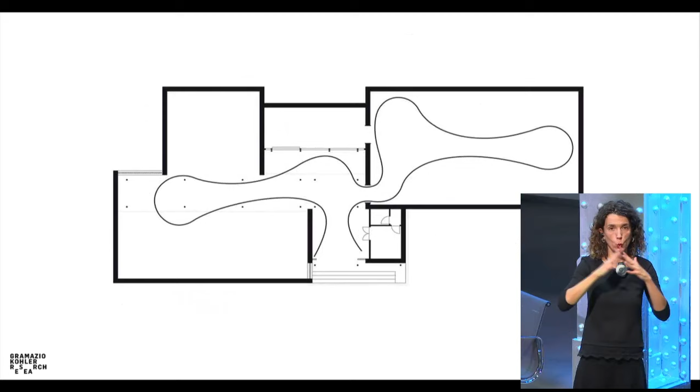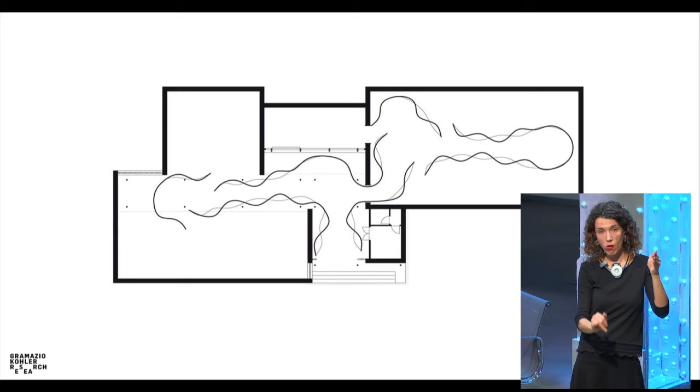Now, this was the installation in the pavilion. It's a 100-meter long wall, and the installation is called structural oscillations because wherever this wall was relatively flat, the wall started to oscillate, and wherever the wall was curved, it just stayed straight up. Now, why did it do that?

Well, this was a way to have all these individual wall elements standing by themselves. So you didn't need any further structural support. You didn't need any anchoring in the floor. Basically, it's like a sheet of paper that you fold a bit until it stands. So we embedded the structural logic into this wall, and through that made a very simple constructive system to build this wall.

And now you can see these qualities that this wall has. It has a very textile appearance. It's very lean in material use. You see how thin this is and how elegantly this winds through the space. But you can also see that we did not design the actual shape of these oscillations. We designed the logic, the rules, the algorithm, you could say, on how this forms.

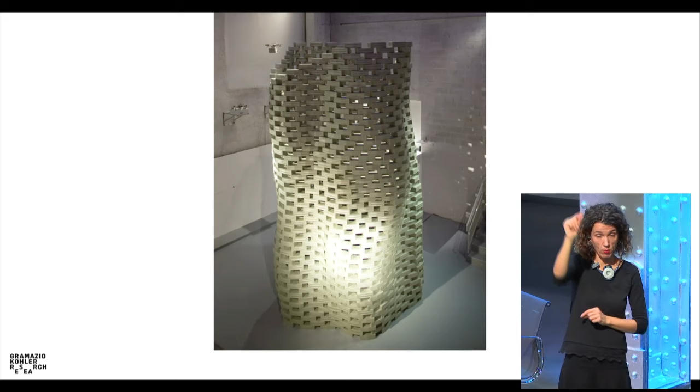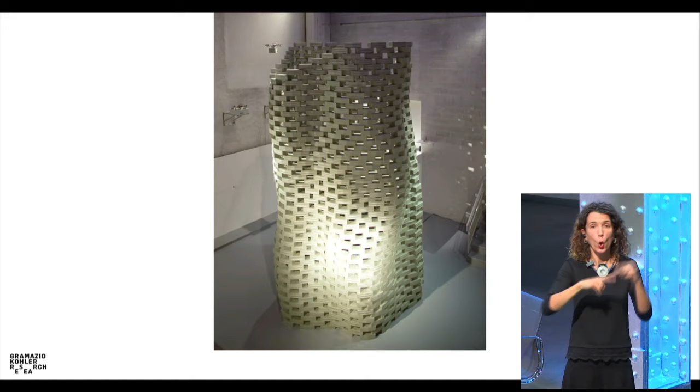Good. So a bit earlier than this project, we did an installation also with flying quadcopters with the same professor. With this installation, there was a 6-meter high tower for the FRAC in Orléans, and this tower was autonomously built by 4 quadcopters which changed shifts. So some of them sometimes went to charging while the others continued working, and so on. So no human ever touched this vertical structure.

And we took this as a starting point also for a fictional project. So we said, can we think of this structure as a model for a city? And we co-developed a project for a city and a project for robotic assembly. What you see here is actually the city, so it's a 600-meter high tower. It's a city for 30,000 inhabitants, and it's a city as an object. The idea is that it's fully self-sustainable in ecological terms, so you have energy generation in it, etc.

And that's on the one hand side. On the other hand side, you could also take down the city if you don't need it anymore. So the idea is, well, you build it up, but you could also build it back. So you don't just grow city carpet over city carpet, but you really contain it in an object and you build it back. That's the kind of conceptual model.

It had these double-story park rings. This is 10 meters high. The length of such a ring is 1 kilometer, so you can walk around in this structure. It's fully pedestrian. There's no car in it, of course, but you can also go to the outside because the city is located in Meuse. That's a region in France where you have the lowest population density.

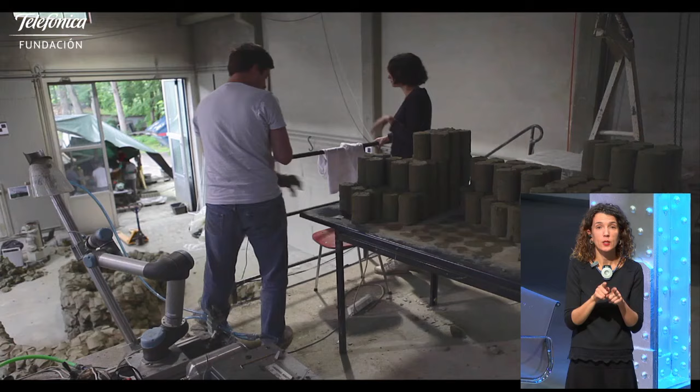We extruded clay projectiles, made sure that they all have the same weight. And then we put this on this small cannon, which is directed by a robot. So we shoot it off from this little gallery up to a distance of 10 meters away.

Scan what we produce, so that we know where to shoot next. And here you see one of these clay lumps landing. You see another one. See a larger view, and you see that we actually get surprisingly precise kind of 3D print, if I may say so, with clay from distance.

So we use a ballistic principle, not for warfare, but really for civilian use. And these structures, at some points, were very, very slender, so maybe 10, 12 centimeters slender. Then the highest point, I think, was 2 meters 30, which we reached in this week. And I mean, it's very prototypical.

It's not architecture yet, but you sense maybe there is completely other ways of building which we have not yet thought about. And that's why I wanted to show you this project and how robots could also have a bit more a peripheral role. Here you are sitting at the landing point of a projectile, and you watch one projectile coming.

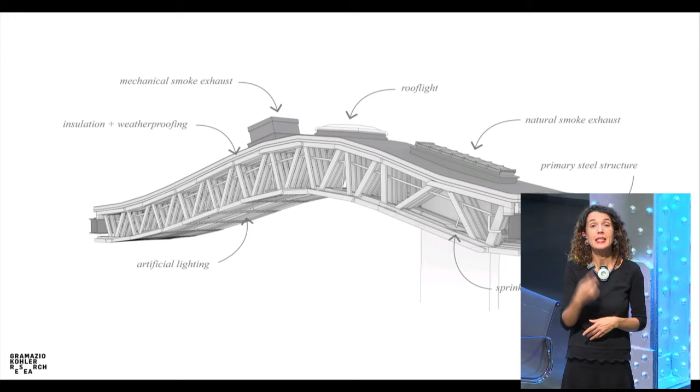So it has an optimized structural depth, this roof. It's built in these individual beam elements, 168 of them. Here you see the layout of these individual slats. But what's most important is that it embeds all the different subsystems that the building needs into this roof structure. So you see here these different systems, and now if you combine this with the plan that you've seen, you get a sense of how it adapts to every part.

And whenever you change something, so if, for example, you say, well, actually, through the tendering process, we got another manufacturer of the roof light, you change the roof light proportions, and this entire roof adapts to it. And that's another advantage of these new design processes, that you actually stay flexible until a very late stage in planning. And what usually causes huge turbulences if you change planning at a later stage, here becomes very easy.

If, as an architect, you think ahead what could change later on in the process, you can build it in, actually. This is how such a model looks. So the raw model in the front, and if you render all the parts in it, then it becomes the end model. But this model is not drawn, it's programmed. And to indicate to you why programming is needed, I show you this detail on how these slats connect.

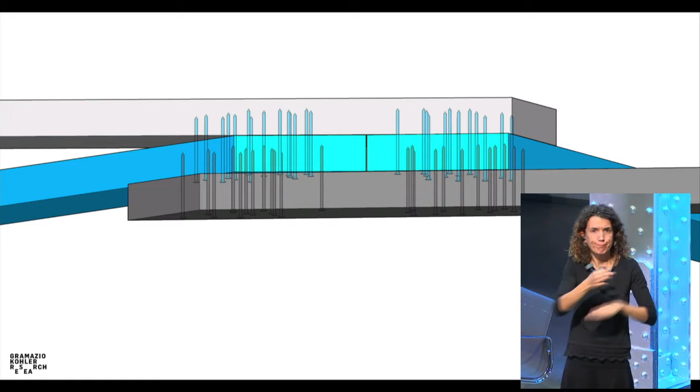There's a number of nails here, I think it's 500,000 or so in this roof, which connect these different slats. And it's so complex to bring in these nails and make sure that you fulfill the structural requirements. At the same time, you don't hit another nail in the next layer. It's really only algorithmically and with the computer that you can do this.

You don't want to do this by hand. So this is how it looks. And this is how the roof is produced. It's the Swiss manufacturer who specifically bought a machine to build this project, but is now able to do all kinds of projects with digital fabrication.

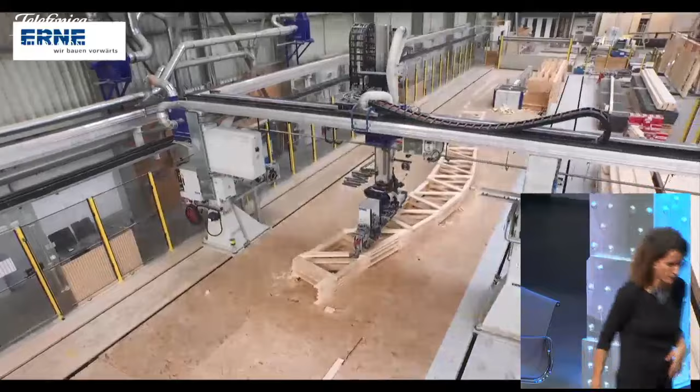So this robot basically takes a slat, cuts the different end angles, then lays them, does this nailing pattern that you've seen before, then changes its aggregate, and does some end cutting, some trimming. And what you really get is something, again, like a 3D printed beam, but here it's not printed from dust and binder or fused together metals or so.

It's literally from material as you get it from nature and connection. So it's very classical in that sense, using classical material systems and connection systems. At the same time, it's a fully digital additive construction process. And it's quite economical, and like this we could realize this building. And I can say that we all really like to live and work in this building, so we're the users also, and some other people, and most reactions are really very, very positive.

Below what you've just seen, this space, is our new robotic fabrication laboratory. This is how it looks. The floor is empty. The robots just come from the ceiling. It's basically a replacement of what used to be the crane in the hall. And now whenever you need robots or digital control, you just call them. They basically come down and assist you with building amazing structures like these, here designed by Stefana, who's sitting in the audience. Good.

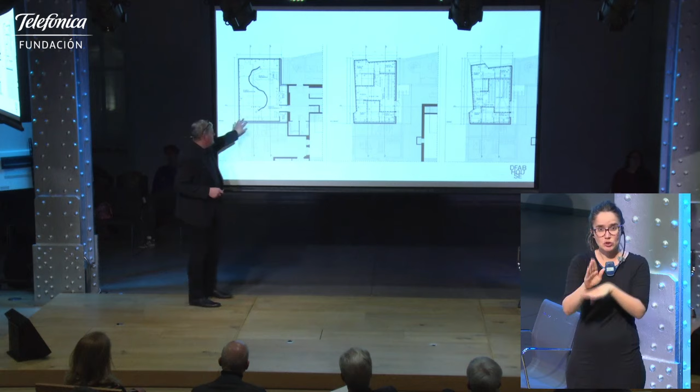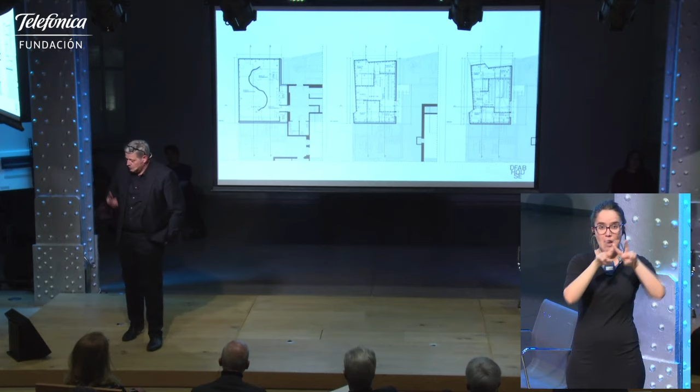And here you see the program of that house. It has basically a very open ground floor plan organized around this S-shaped wall, and then it has 4 living units for guest researchers in quite dense two upper floors. So it's a 3-story unit. This is the parcel that we got. This is roughly how it will look, but I'm not so interested in renderings. It might probably also change. We're really interested in the way that we build and design this. And these are the different research projects that go into this building.

What's really new in this building is that it's fully inhabited. It needs to comply to all codes in Switzerland, be it thermal insulation, fire regulations, etc. And all the structural parts of this building are built by new digital fabrication technologies. So we bring digital fabrication from something which has a tendency to be ornamental to something really structural. That's the significant step, even though the building itself is quite a small building. So I'm going to walk you through quickly from below to top, just to give you a first impression. This is currently ongoing, so I also will not go into details.

So the first project is really this S-shaped wall, which is built by a mobile robot. This wall has been designed in a way that it can carry the 2 stories on top and take all the forces, also the wind forces, lateral forces of the building. It's being built by a robot that builds this mesh structure that you can see here, that's optimized for fabrication. You've seen the red parts before in this animation.

Red is when fabrication cannot work anymore. So it's optimized for fabrication and for structural performance and for the spatial layout. And then this mesh structure can be filled with a manual process. So not everything is digital. It's a combination of human craftsmanship and digital craftsmanship.

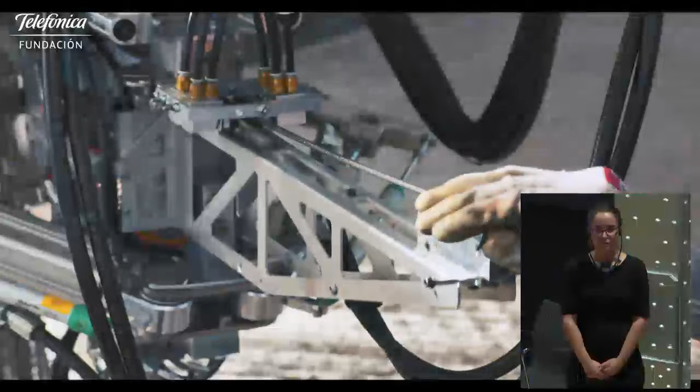If you take a look at the number of people and the robot on the construction site, you don't need to be worried in the short term. So we have about 4 people and 1 robot ratio.

Good. Now this video got stuck somehow.

Good. So here are, at least from our group, the proud finishers. This has been a work in collaboration with another roboticist called Jonas Buchli, who actually developed the entire robotic system. His people are unfortunately missing on the picture.

But I think you also see that it's even a pity to fill this structure actually with concrete. It's so beautiful, just as this doubly curved mesh in space, and you sense how the digital is very intimately connected to the physicality of this mesh. So here are some impressions, and currently it's being filled. This is the first layer, and there's going to be a top coat on it.

And the remarkable thing here is that there is no formwork needed to build this wall. So there is no waste for any formwork. You can build a doubly curved wall, and so you save a lot of material, and you can structurally optimize the shape. You can also make differential wall thicknesses, so you can save a lot of concrete, and saving concrete is a big benefit for the planet, because concrete is the most polluting construction material that we currently have. It's most widely used all around the globe.

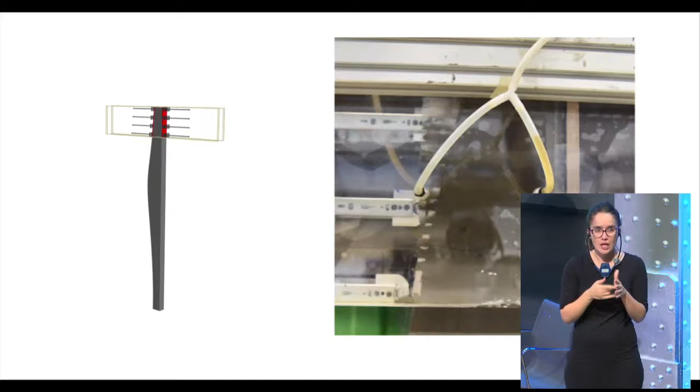Good. I quickly walk you up. This is another concrete technology which we have. It's called smart dynamic casting. It's basically a slip casting process where you can change the form during your slipping concrete, and you can produce elements like these facade mullions.

Here you see one in a kind of drying situation. You see the final product, which has a very nice surface quality. We're almost at a kind of industrial level. Again, you don't need any formwork to produce these forms, and each of these mullions can be different. So in this case, you have a different depth for each of these mullions, because the window panels don't have all the same size and don't have all the same loads on the windows. So you can have adaptive forms which have structural logics.

Then this is a project of the professorship of Benjamin Dillenburger, and also our concrete, we call him concrete magician, Dr. Robert Flatt. This is a ceiling which is cast onto a 3D printed formwork. It's a very thin formwork, only about a centimeter thin, which has very intricate forms. You can see these almost naturalistic forms. You see this high degree of details, and you see how it adapts to the mesh mold wall below.

So it directly takes over the formal characteristics of the mesh mold wall and reinterprets this with another technique. So 3D printing formwork, then casting a thin layer on top of it. Here you see an assembly sequence of how these elements are then post-tensioned.

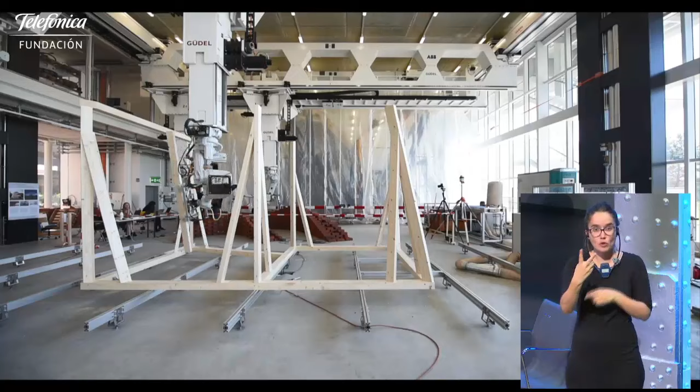So you need to find a sequencing logic where multiple robots can actually directly build spatial structures, and you see then there is an expression of this building typology in the structure. You see how the robot, for example, once he placed this beam, rotates in these side beams, so it comes here, drives in, and then just rotates it in place.

And you can sense that, yes, it's close to what the humans could do, but humans would really need to measure, etc. So that's why they like to build on a plane. They don't like to build in space. But the robots really have the accuracy to just put something in space, wait till the other comes, etc.

This is also man-machine collaboration. The robots only really place the parts and cut the parts, and the humans do the connections because they're very fast, they're very agile, they see the details well, they can do minor corrections. So we don't need to automate everything to go into digital construction. A bit the complexity of these assemblies.

Then we have a translucent facade developed for the system. And this is roughly how it will look in the interior. So in the nighttime you will actually see the structure through the translucent facade. In the daytime it's going to be a very light-filled spatial timber structure.

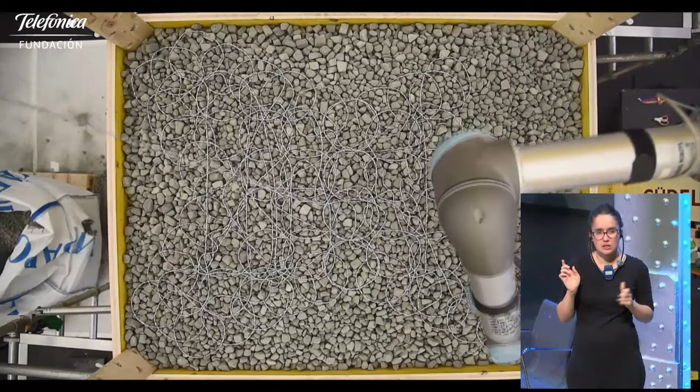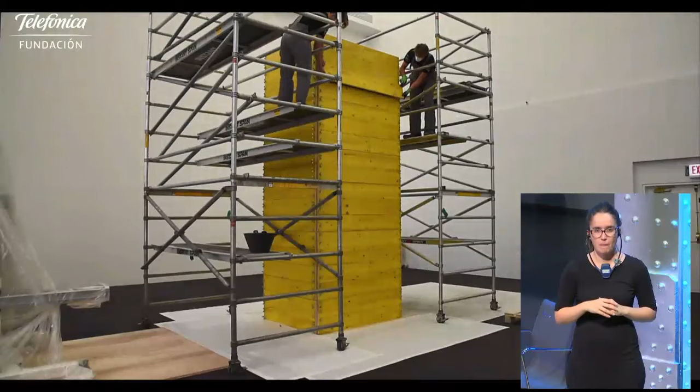So here we take just gravel material that you find almost everywhere on the planet, and we combine it with string. In this installation we build it in a box, but we have newer advancements where you can also do this without a box. Here a robot lays layer by layer a set of string, or this formation of strings, which you can see here. Then by hand we add a layer of gravel, and another layer of string, and so forth. So now the robot embedded some information in this volume while building it up.

And when we take the scaffold away, you sense there is some fall off, and if we then gently scrape this structure, you can unearth the information or the structure that was embedded by the robot in this gravel. So in the end, you get this vertical structure, our rock print, which only consists of gravel and string. So there is no binder, there is no metal tube reinforcing this. It's just gravel. And if you walk on to it and you touch it, just gravel falls off.

I did it a number of times with visitors there that said, no, that's not just gravel. I said, oh yeah, sure. And stuff falls off and they take a step back. It's quite scary. It's 2 tons of weight. And it's really quite impressive. So it stood for 3 months. It didn't move a single time. We monitored it. And then of course the fun is to build it back, because